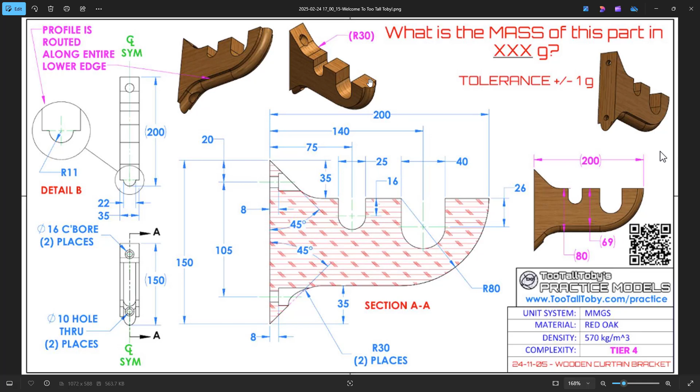Today we'll be going through another Too Tall Toby practice model dated 11/05, the wooden curtain bracket. Looking at this model, it's actually a very simple model with a series of cut cylinders using the blend tool, and even using this really cool tool where you can use a sweep to create this geometry here. So we'll get started with the part.

We'll drag in an extrude block and adjust it to the proper dimensions: this being 200 millimeters, this being a total of 80 millimeters, and the total depth or width being 35 millimeters.

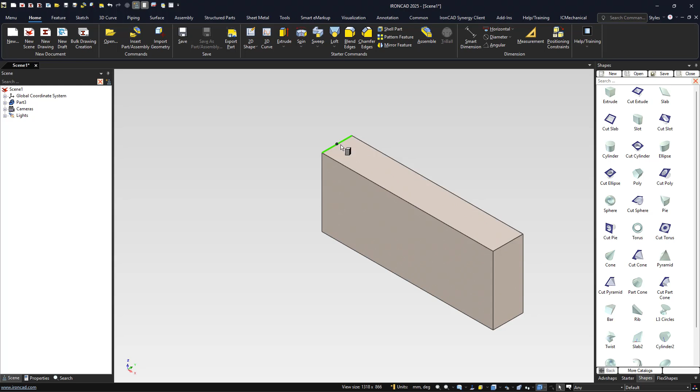Now we'll go in and add a rib feature to create this back section. We'll use the tri-ball and spin this around 180 degrees. We'll also unlock the tri-ball and move this to be in the middle here, and bring this back to connect to this middle section as well.

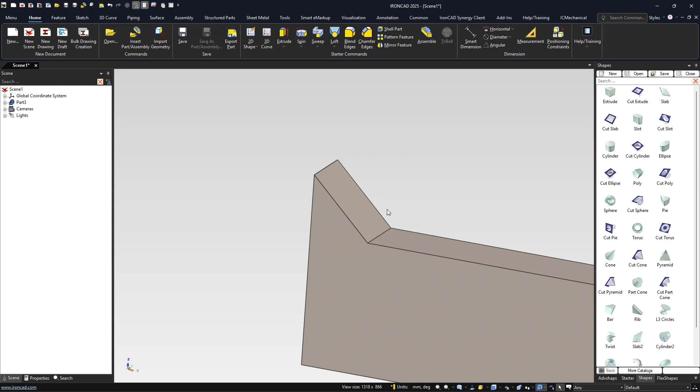We'll adjust this to be 35. We'll bring this down as well to be 35. This section here to be 35 as well. This will create that 45-degree angle here.

Now we'll add the tri-ball, unlock it, and bring it down from this point and up 40. That'll give us the midpoint, which will come down here, right click, and we'll mirror link, which will give us this geometry here.

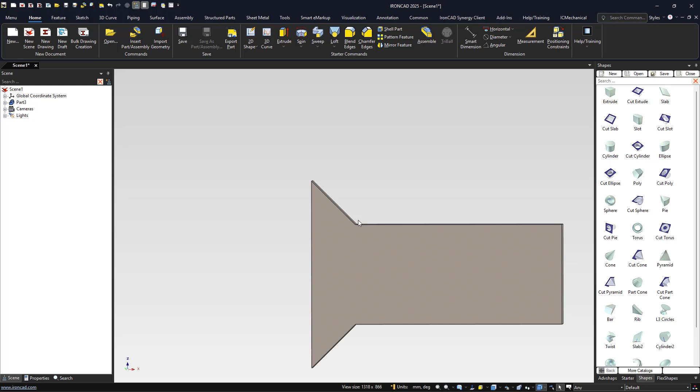Now we'll come back in and add the blend to this section here. This is a total radius of 30. We'll remove this section here to be 30, and then we'll come here and add this to be 30 as well. Click OK, this will give us that geometry.

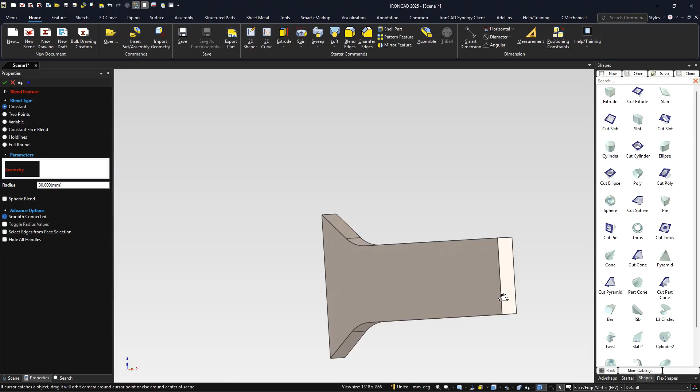Now we can come to the front section here and add the blend here, which is 80, to give that radius. Click OK. We can then come to this front face as well and add these two cuts here.

So we can add an extrude cut starting here. We know that from the top it's flush, and the total height from this extrude is 16. The total width of this extrude here is also 25. So we'll make sure that this goes all the way through.

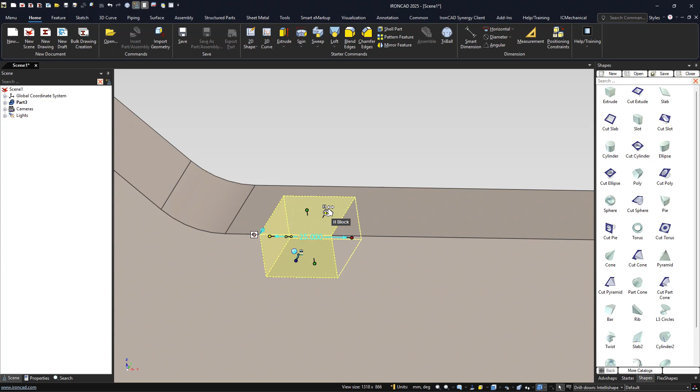We'll also make sure that this extrude cut here is the proper length. Starting from the middle here, this has a total distance from this point to this point of 75.

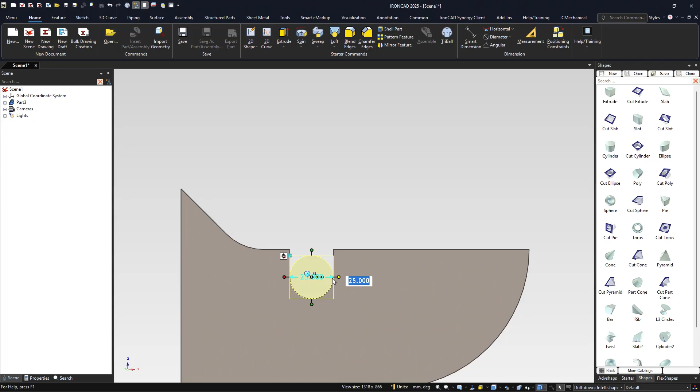So now we can add the cut cylinder here. We can adjust the cut cylinder to be a diameter of 25 as well, and make sure that it's flush.

We know that from the top of this section to this section, this point is 26. So that means we need to also adjust this section here as well to bring it down. There we go.

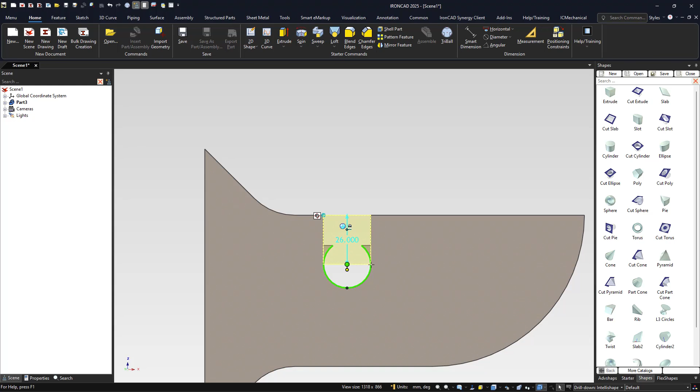Oh, I'm sorry, this one is 16. This one is to be 16. This section here: to create this section here, from this point to this point down is 26. We'll adjust this one also to be 40, and we'll have this come all the way through.

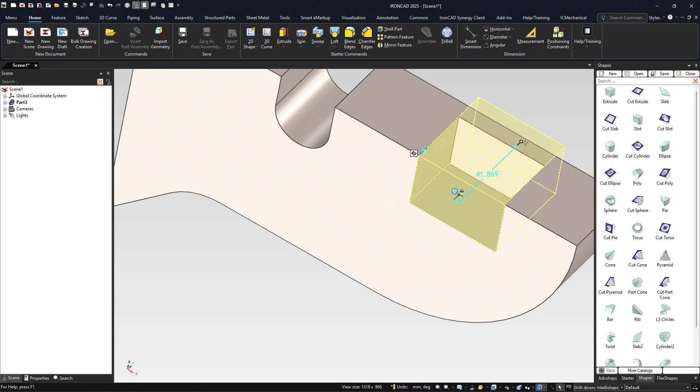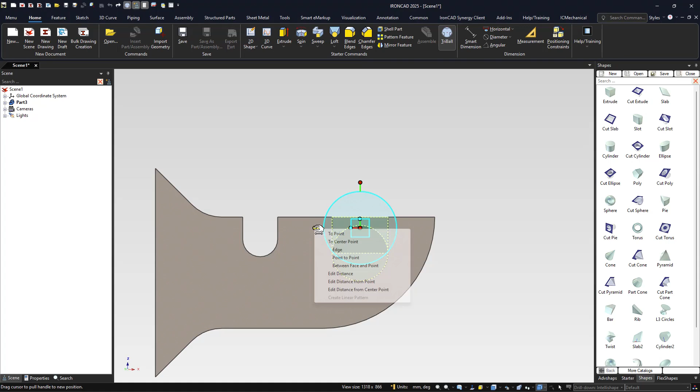Next, what we'll do is add the cut cylinder as well, making this have a diameter of 40, leaving this section here to have the total point, just like this, for the total point from this distance to be 140.

There we are. So we now have these sections here. Last thing we'll need to do before we go and add the holes at the top and the bottom is we need to create this sweep down the middle.

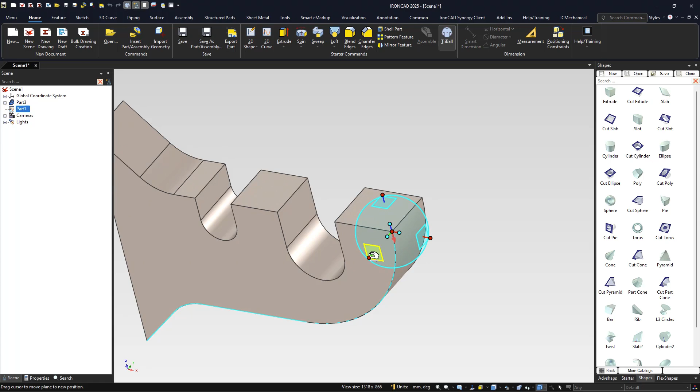To create this sweep feature, we can click until we get to the surface edge here, hit Tab to fully select this edge, right click on the edge, extract 3D curve. Take the 3D curve, use the TriBall, and adjust this to be at the midpoint there.

What we'll do now is go in and add a 2D sketch here. We'll have this be normal to curve at point.

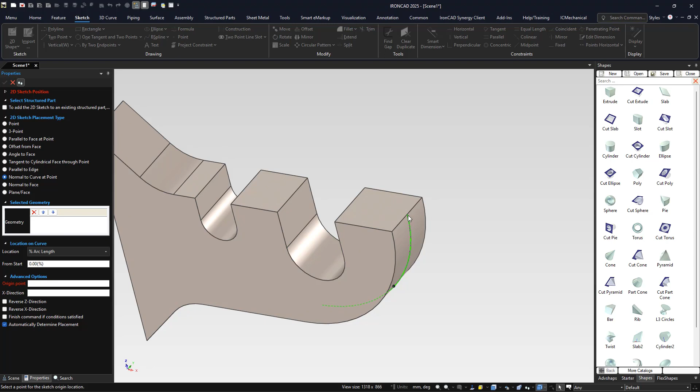We'll adjust this arc percentage. The origin point will be here. Let's see what we can do here. We'll select the geometry here. Click OK, and allow this to come to this point.

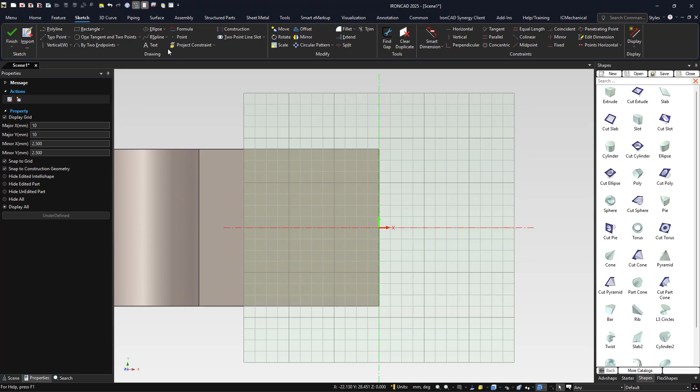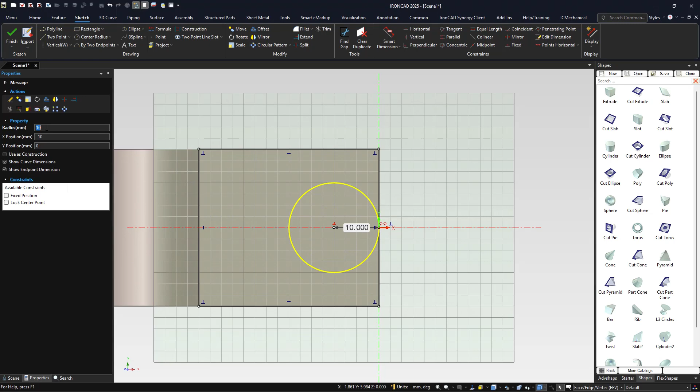What we'll do is go in and project this face, making sure to add a center radius here. Let's do it from this point, which we know the center radius would be 22, so we'll change this radius to be 11, so it'll be 22.

We'll bring this part down to halfway, so we'll make sure that this is matching. Hit trim. Trim this as well.

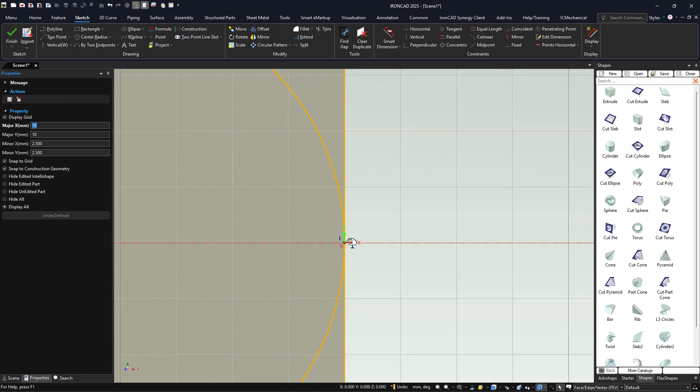For this edge, we'll bring this out a little bit more, or we'll remove this tangent here and bring this out a little bit more. Then we'll click OK.

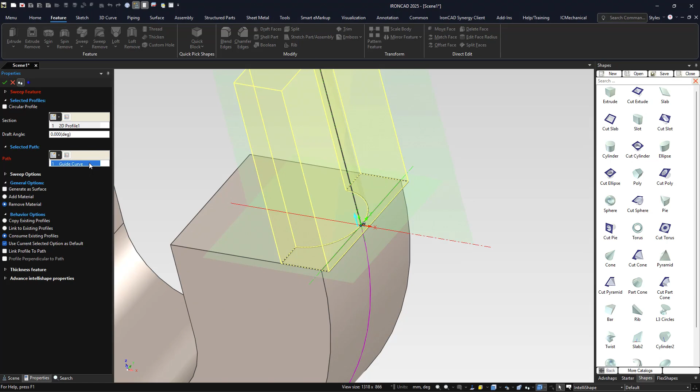Now we'll go into the feature, click sweep, click on this part here. We'll remove material, have this be the section that we use, and this be the guide curve here, which will then create this section here. We'll click OK, which gives us this selection. We can right click and hide it.

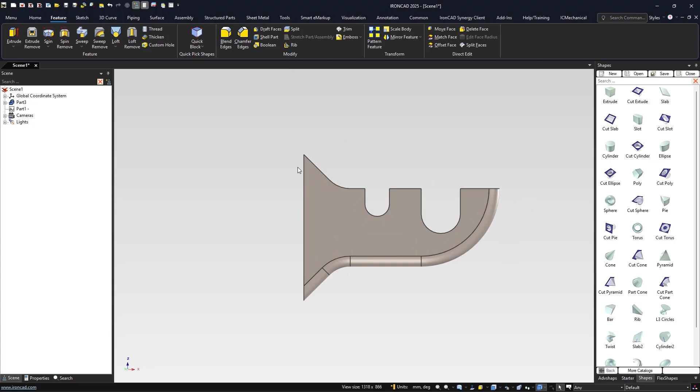Next we'll go into the back and adjust the holes that are here as well. We can go into the starter catalog, IC Mech tools, and adjust a hole here. These are counter bore holes, so we can select the counter bore, and we'll actually flip it.

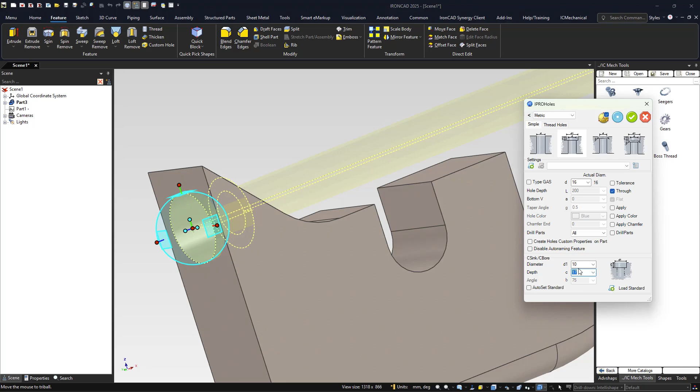So the diameter on the inside would be 16 in this case. The outer diameter would be 10, and the depth for the inside diameter would be 8. Adjust like so. This will be through, so we'll click OK.

What we'll do is come back here, open the tri-ball, and adjust the total diameters or dimensions for this part here. For this section, this needs to be aligned with the very middle, so from this point here we know it's 35 divided by 2. From the top section here, the total height would be 20.

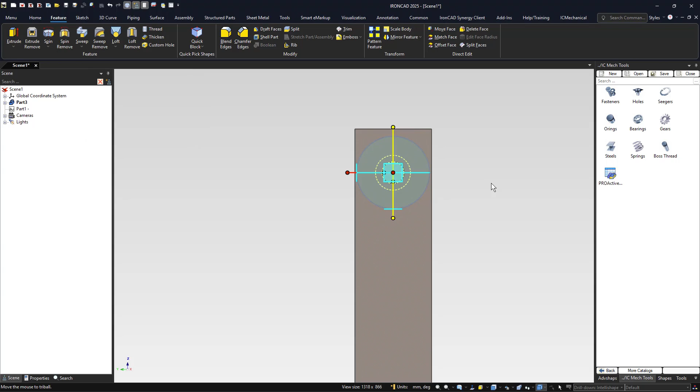Now we can come back to this face and also adjust by right clicking and bringing this down to the bottom, linking it, and have a total distance of 105. From the bottom, come here to check. There we go, this has the bottom dimension.

Lastly, what we'll do is click, go into the properties. We'll adjust this to be 570, and 239 is our total mass.